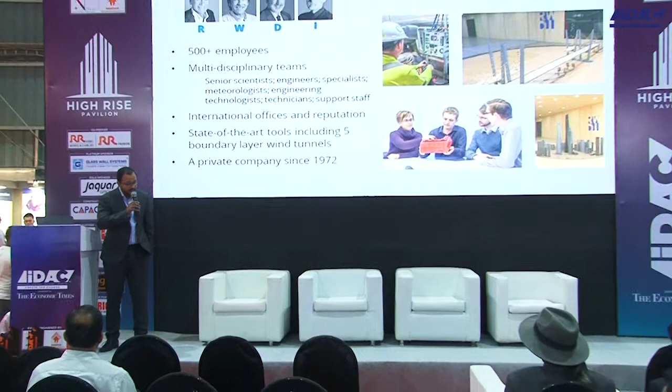So a little bit about my details. I'm from a company called RWDI. Most of the people who have worked in high-rise buildings may know RWDI because we have been in this field for the last 50 years. Basically, RWDI is Rowan, Williams, Davies, and Irwin. Those are the four Canadian scientists who started this firm back in 1972, and we have been fortunate enough to be a part of most of the groundbreaking structures across the globe, including the current tallest building in the world.

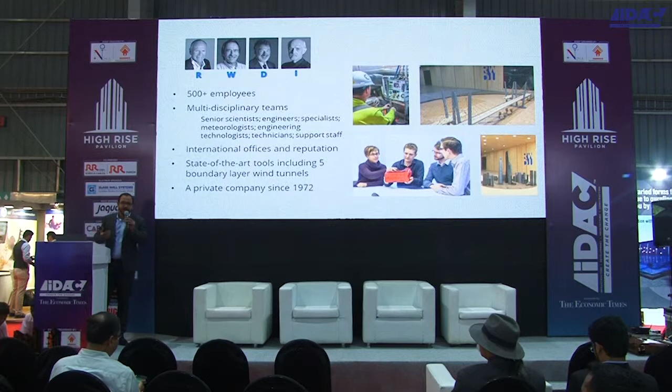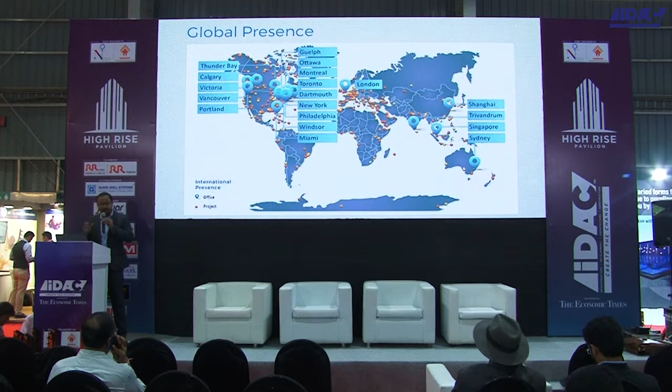So if you look at the RWDI team, we have engineers, climatologists, vibration experts, people from different fields, because wind is such a unique field, which requires people from different arenas to come and work together in challenging projects, which is very crucial for the design of high-rise structures. If you look at our global presence, we have offices in all parts of the world, and right now I am focused in the Indian office, which is in Trivandrum. We have done projects in every part of the world, including Antarctica, and we still have a lot of research going on many high-rise and challenging structures.

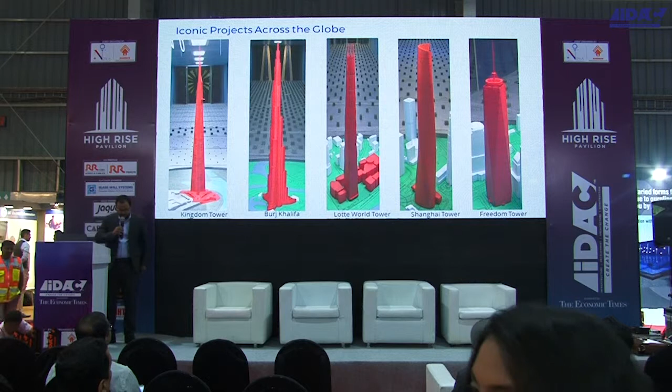And we have been fortunate enough to be part of at least 95% of the world's tallest buildings. This is published by the CTBUH, and RWDI has been the wind engineering consultant for most of the high-rise structures across the globe. And these are some of the iconic structures in our wind tunnel. You can see the scaled-down models of all those high-rise structures, which are wind tunnel tested in our lab to understand how wind acts on these structures and how they can be designed properly. So these are the iconic projects across the globe.

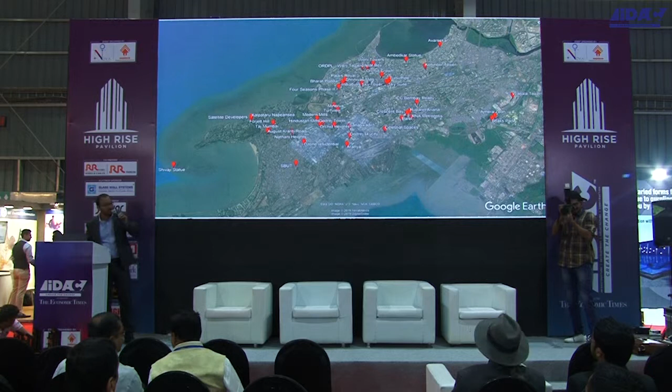And if you look at India, we have been in business for almost 12 years. I have a big list of projects, so instead of showing all of them, I try to show them by location. These are all high-rises. I would say 95% of the high-rise buildings that you see in Mumbai are wind tunnel tested by RWDI. So I'm just showing you glimpses so you can have an idea about the kind of work that we are doing in Mumbai itself.

So the question is, when it comes to wind engineering, why can't we still use codes or standards as we have been using in the conventional method? Why are codes and standards not sufficient when it comes to wind, especially for high-rise structures? I hope most of you who have worked on high-rise buildings may have experienced these issues, like complex geometry and selection of terrain, because when you do a code calculation, you are assuming your building to be a uniform, regular-shaped structure. But in reality, none of the buildings are of regular shapes.

It has all the complexities in types of shapes and terrain. We can't assume that it's going to be open terrain all around. You have water features, suburban terrain, urban terrain, different terrains, and wind is passing through all those terrains before it comes and hits your structure. So you have to have a better idea about the terrain.

Then directionality, from which direction wind is predominant for your structure. Basically depends upon how your structure is oriented and things like that. Surrounding structures keep on changing, so how are you going to account for that while doing the loading part? And then vortex-induced oscillations, which is one of the most crucial parts from a wind engineering point of view.

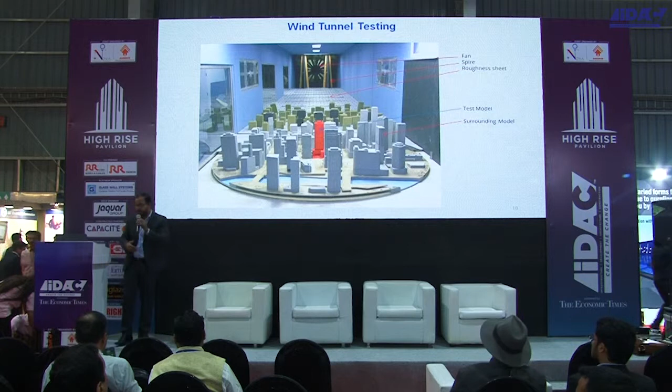So the final answer is, wind engineering is still relying completely on a tool called the wind tunnel, where we do all the wind tunnel tests to identify the loading on structures. For people who are not familiar, a wind tunnel is nothing but a kind of long box with a big fan at one end, and on the other end you have your study building along with all the surrounding buildings on a rotatable disc, and the building will have sensors which try to understand the loading acting on your structure. So if you look at this one, your shape is exactly replicated along with all the surrounding buildings, and the terrain is taken care of by the roughness sheet which you see in the picture. So that's how we do wind tunnel tests to identify how wind loading is acting on your structure.

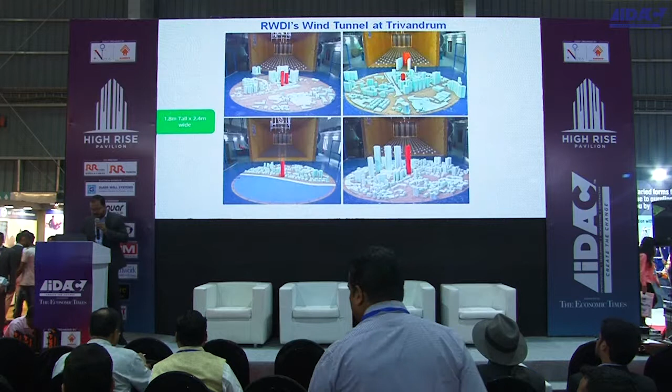This is RWDI's wind tunnel facility in Trivandrum, Kerala, where you can see all these buildings are in Mumbai. All Mumbai projects, you can see different parts of Mumbai in all these projects. So this is a close-up shot of the wind tunnel in Trivandrum.

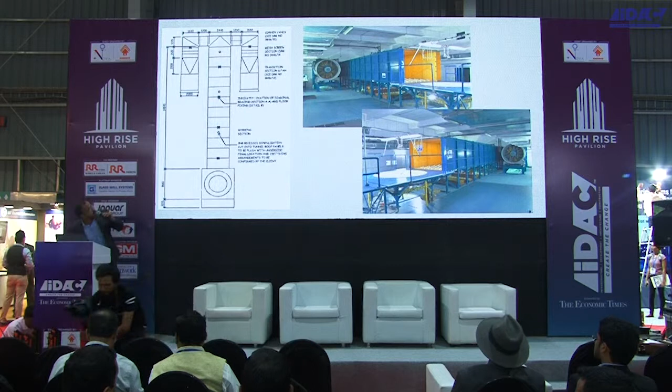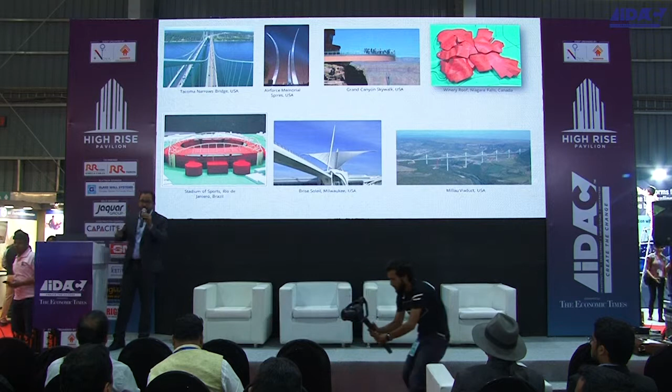So even though this is for tall buildings, I just want to show one slide, because it's not only for buildings. Recently we won the Pune-Mumbai Missing Link Bridge. So this is going to be the second bridge in India for which our lab will be doing the wind tunnel test. We have done the Anji Khad Bridge in Jammu Kashmir before. So bridges, memorials, skywalks, interesting roofs, stadiums, airports, all these structures are wind sensitive, and for the proper design of these structures, we have to know the exact wind loading acting on them, which is possible only through a wind tunnel test.

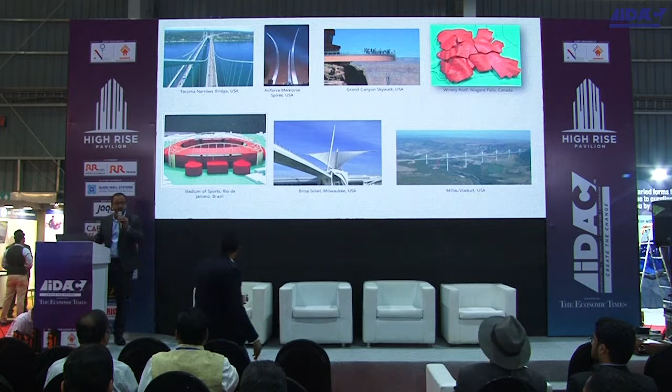So the first study, which is very simple, is the cladding wind load study, where we are interested to know the pressures acting on your exterior facade or the cladding elements, so that the facade consultant can select the right kind of cladding elements for designing the structures. The process is, once we get the 3D model from the architect, we create our own 3D models on the computers, then we 3D print the physical model using 3D printers, and then install sensors and do the wind tunnel test.

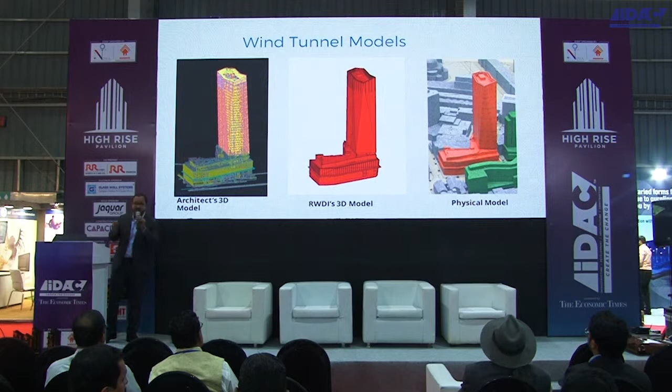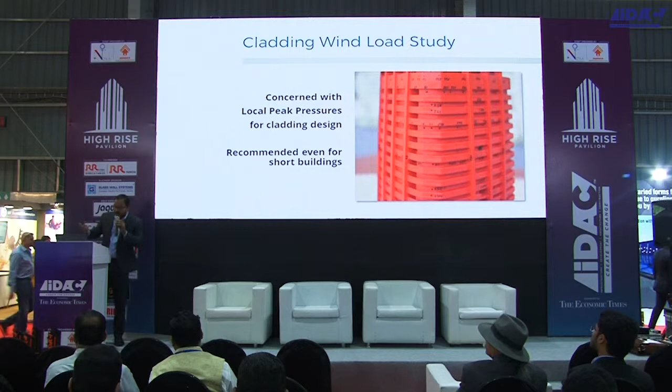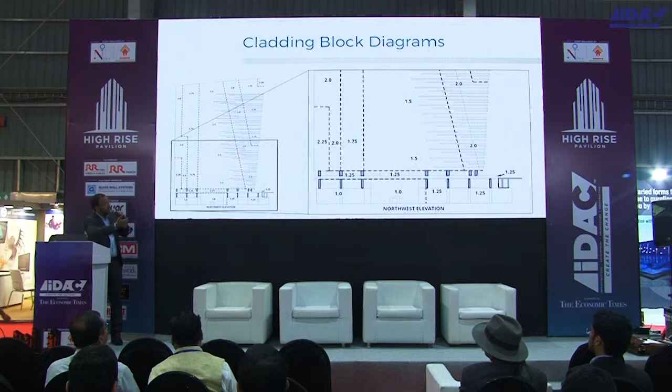If you have a close-up shot at the models, it would be like this when you have balconies and stuff like that. We measure instantaneous pressures across the balconies to understand how the balcony guardrails and such, which are very wind sensitive, have to be designed. Based on the pressures from the wind tunnel, we give block diagrams like this. This is a close-up shot of the elevation, and it's showing 2.25 kPa for one corner. Based on this, the facade consultant will choose the right kind of cladding material, or how the facade elements in those areas have to be designed. This is purely for the cladding part.

Now, when it comes to the structural part, we are interested to know the overall structural moments, shears and torsion acting on your structure, which is very crucial for the structural engineer for the design of the foundation and all those things.

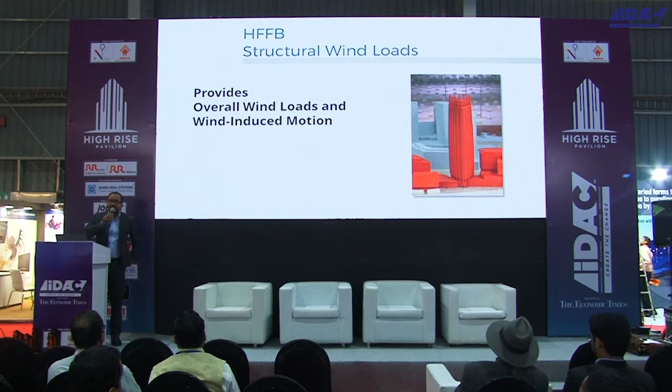So for that, we normally use the high frequency force balance test. As you can see, I don't know whether this is clear for you. There's a flexure which contains the strain gauges, and the building will be connected to the flexure, and we do the wind tunnel test, which will give you all the overall wind loads and wind-induced motion, which is very crucial. Nowadays, most of the structures are being wind tunnel tested not for identifying the loads, but to make sure that the buildings are not moving excessively, which means it satisfies the serviceability criteria.

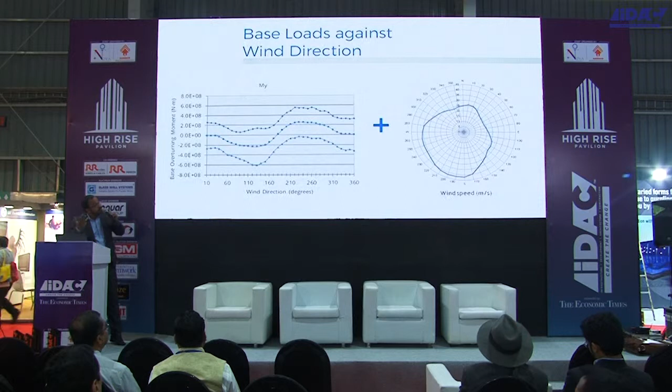So once we do the wind tunnel test, we get moments like this for all the 360-degree wind directions, and that will be clubbed with the wind climate data that we have obtained from the airport data. So when we do this clubbing process, that's when the wind tunnel test becomes very relevant to the site-specific project. And finally, we give the overall forces acting on your structure. So you can see both the moments on X and Y directions along with shears and torsion.

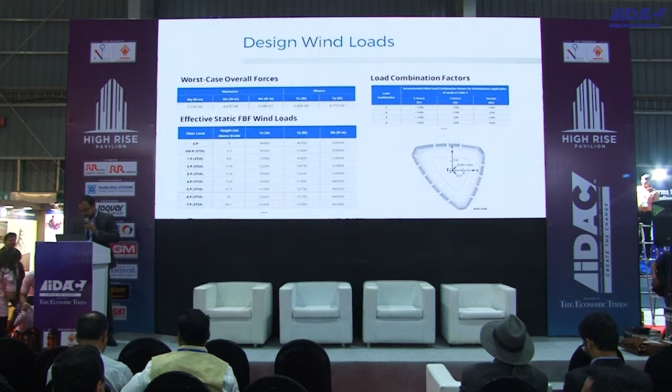Along with that, we also give the floor-by-floor loads, which is very useful for the structural engineers to plug back into your ETABS model, from which you can calculate the deflection and stuff like that. And along with that, we also give the load combination factors, which is, again, very, very important, because that's where most of the time the savings part comes into the picture. Because unless you use the right kind of wind combination factors, the loads are going to be conservative or in the reverse direction.

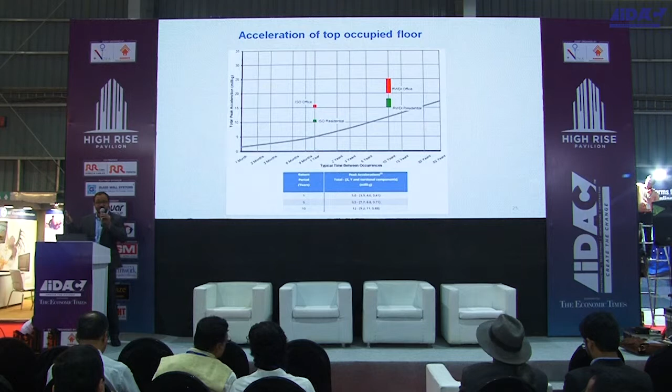So this is the plot for the accelerations. Again, there are different acceleration criteria for different buildings depending upon the occupancy. So we try to find out where the acceleration values are for the specific building. And based on that, we try to give them mitigation measures.

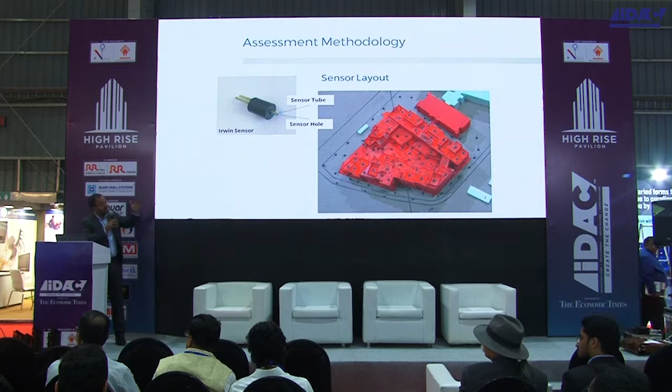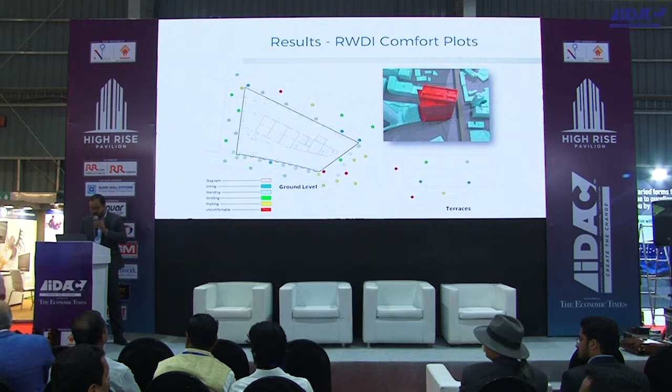So for that, what we do is we try to identify the wind speeds at all those locations by doing a pedestrian level wind study, and then try to find out which areas have an issue from a wind point of view. And if we identify certain areas, we try to advise mitigation measures and how those wind speeds or wind-related comfort issues can be taken care of.

Now, most of the time I get this question when I meet any new clients or new people when I'm trying to give them the ideas of wind engineering: why do we have to worry about wind? So I always have only three reasons. The first one being safety, because as responsible engineers and designers, we are designing structures and we should be very, very careful about the safety of the occupants. So the first priority should always be safety, to make sure that the structures are safe.

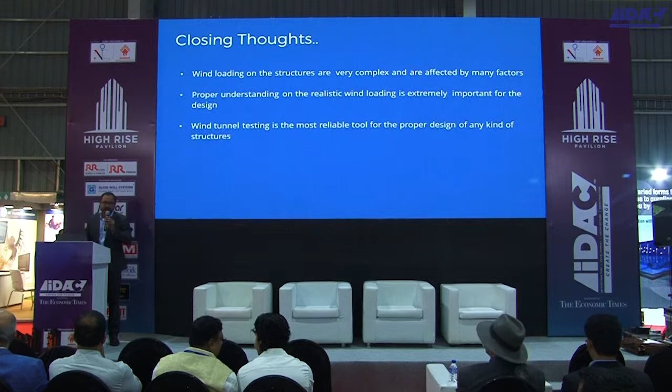So I hope I didn't take much time. So my closing thoughts are, wind engineering is a new field. It's a very niche field which comes under civil engineering, but it's very, very crucial when it comes to the design of high-rise structures. And people who are interested in the design of high-rise structures should definitely pay attention to wind engineering techniques. And I'm 100% sure that by properly applying wind engineering techniques, you can definitely bring a big change to the overall design of high-rise structures.